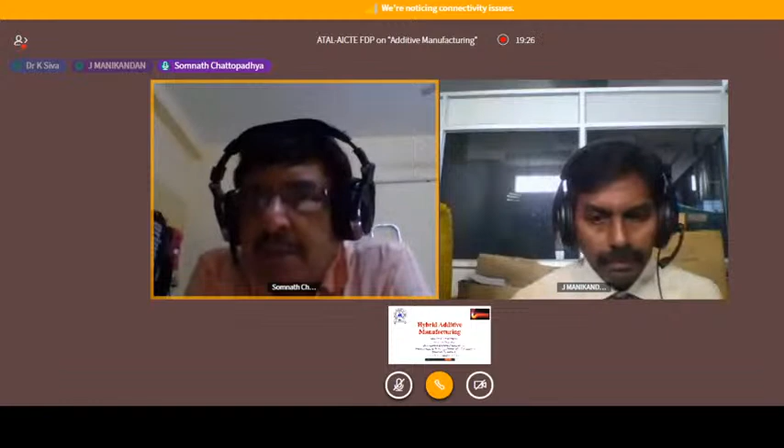So our topic today is hybrid additive manufacturing. Though this could be the last topic of additive manufacturing, I will start with some reverse engineering so people can get an idea about what is happening here and in different parts of the world related to manufacturing. Very interestingly, I'm grateful to Professor Karunakaran, who is singing the success songs of mechanical engineering, because everything has to be executed in deliverable form. And mechanical engineering means you can grasp the thing, so mechanical is associated with that.

Just to tell about the Latin word meaning of manufacturing, it comes from the word manus plus factus. Manus means by hand and factus means that which is produced. So manufacturing in the 15th century meant produced by hand. Today's manufacturing is anything but manus plus factus, that is, produced by hand. But still people stick to the old terminology, because before the industrial revolution, entirely the part is manus plus factus, produced by hand.

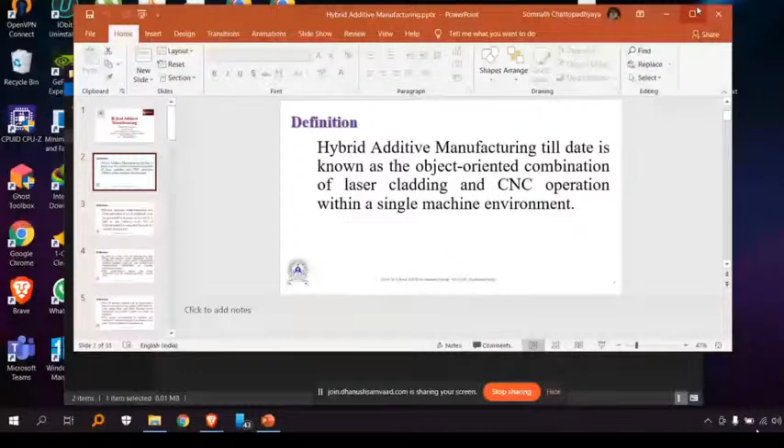Can I continue? Yes. So, I have told that object orientation is very important. So why laser? Laser is a champion strategy - just like a batsman can bat, laser can cut, laser can measure, laser can join, and do all sorts of things. And laser can perform very precise operations.

A little technical hassle is still there in laser because laser cannot generate huge amounts of power till today. So we are only limited to 20 kilowatt, 30 kilowatt, 40 kilowatt. So there is sometimes a limitation in terms of dealing with higher material deposition or higher material removal rate and the joining of thicker plates. So that is still a technical hassle, but otherwise laser can be used for everything.

It is just like a trump card in terms of joining as well as cutting, measuring and aligning, all sorts of things. Associated with the CNC operation in a single machine environment, we are looking for a universal machine which can join, deposit, cut, measure, inspect, and do all sorts of things in one single environment. With a few commands, we can change all those things.

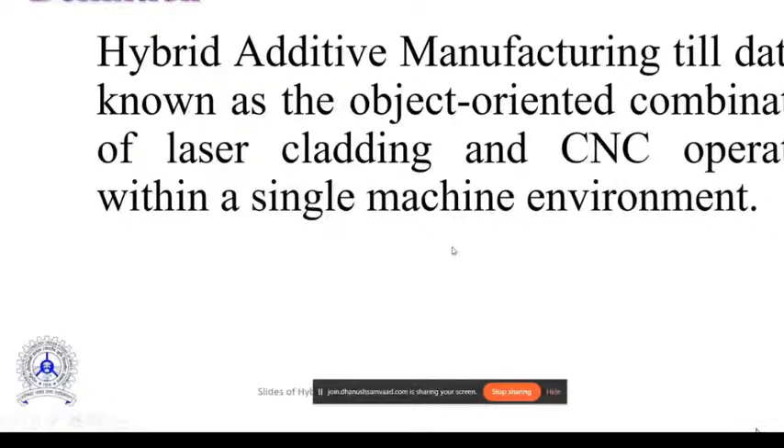So laser cladding, CNC operations and all those things are implemented in a single machine environment, and that can be a very good measure or strategy for hybrid additive manufacturing. This manufacturing has attracted a lot of attention over the past half decade, but it is still in its infancy with a lot of technological hiccups that have to be adroitly addressed, because there are uncertainties, and a road to success is always under construction. Hybrid additive manufacturing strategy is under construction because a lot of things have to be taken care of, many complex things have to be built into one machine tool so that everything can be done with different commands.

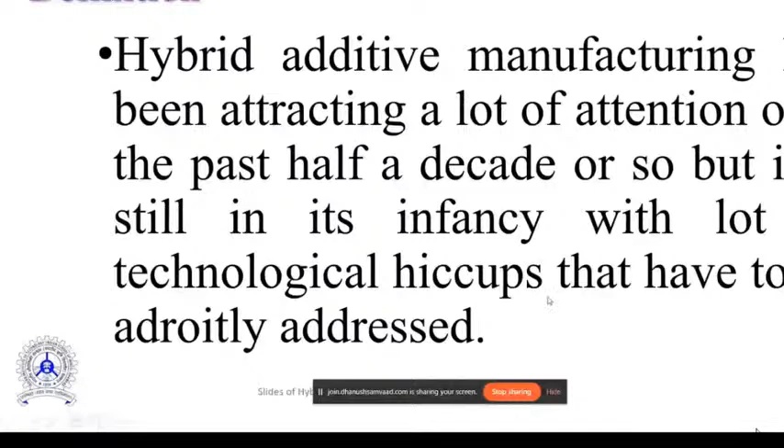So it refers to a new class of machine tool, not the ordinary one, that brings additive metal deposition. Rapid prototyping has been slowly and steadily transforming into rapid manufacturing. It is not only prototypes, even parts and components for very costly cars like Porsche and Mercedes-Benz are to be printed and immediately put forward. Even for space technology, where spare parts management is a very big issue. Very recently China has entered their space vehicle into the orbit of Mars, so this will become a very regular phenomenon.

Even if a bolt is in shortage, there is no other way to send it from the surface of the earth. So one has to print it out, and print it out for actual operation, not just as a prototyping one.

So deposition nozzle capability of the latest three-dimensional printing in the metallic environment, with axis control and metal cutting capabilities, because metal cutting is the intended removal of material. For finishing and high quality feature orientation, we still cannot substitute subtractive manufacturing. We still require some kind of machine tools which can take away material, so along with deposition we have to do some kind of post-processing in terms of material removal.

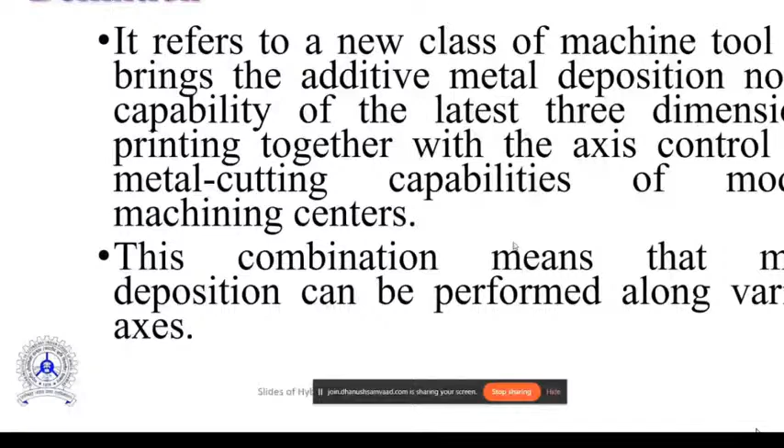So the 3D printed material can be machined to precise tolerances. Tolerances are becoming very narrow and the margin of error is low. So at any stage in the process, we can go back and forth between metal deposition and metal cutting as and when required. Sometimes we are positive, sometimes we are negative. Positive means we are depositing material, negative means we are removing material, and that has to be done in a single machine.

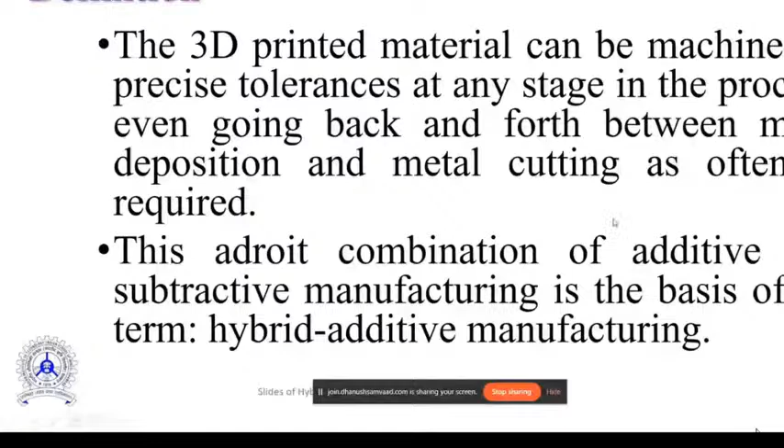This adroit combination of additive and subtractive manufacturing is the basis of the term hybrid additive manufacturing. So additive plus subtractive is combined. You can see these are the features we need for this kind of product. We will fundamentally change the perception of manufacturing components.

We have to make some kind of rope, just nanocarbon fibers. Nanocarbon fibers will lead to the manufacturing of material which has a strength to weight ratio 100 times that of known steel. And if we have this kind of nanofiber based composite material, then we can have a rope to outer space, so that instead of throwing satellites up by launch vehicles, it can climb like a spider along this rope.

So everybody, 7 billion citizens of the world, maybe in half a century or less, will have their own independent satellites. No monitoring and no problem with network related issues. Today we say humorously, it's not an official statement, BSNL means 'Bhai Saab nahi lagta' - but sometimes people say even Google se bhi nahi lagta. These kinds of network issues will be eliminated if everybody has their own satellite. That's only possible because satellite launching cost is very great. So if we can have this nanofiber composite material with a rope to the space station, our individual satellites will climb there - 7 billion satellites individually taking care of that.

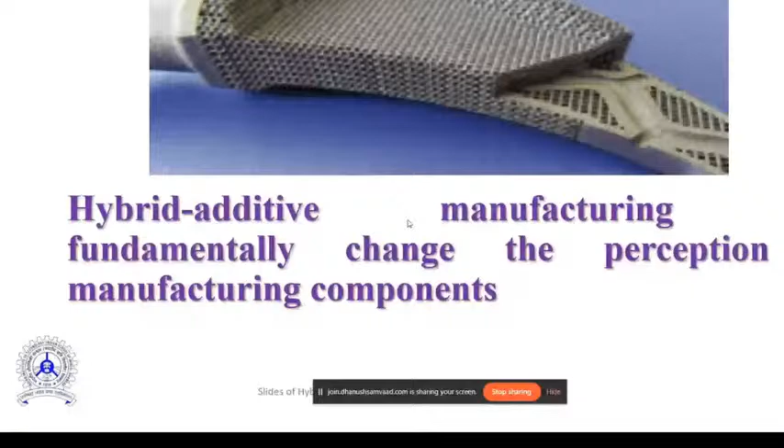I have to quote from the literature - literature people are very intelligent, they can see the world with a vision, and that is none other than Pablo Neruda. He said, give food to the people who are hungry and give hunger to the people who have food. That is the assignment problem in case of all these politicians - poverty and hunger are created by politics. So he said, give food to the people who are hungry and give hunger to the people who have food. And that is true for manufacturing.

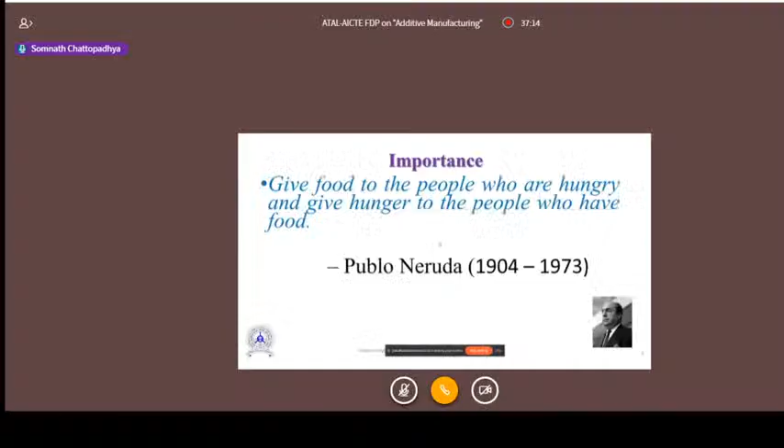This type of design I will consider as online design - it is not offline. We have online classes in COVID and other parts of it, but I always promote online design. Design should not come only as offline design, but nature believes in online design. I will give you some examples.

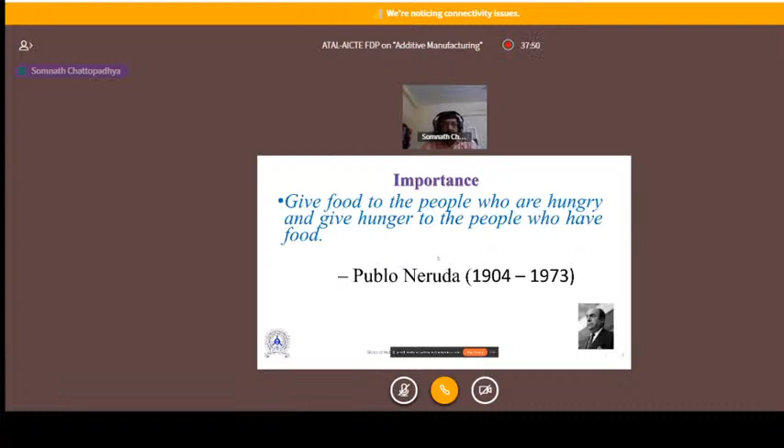Only hybrid additive manufacturing - these kinds of situations can enable us to go for these kinds of systems. So this powder deposition, the conventional additive manufacturing powder deposition process, allows placing material in the desired composition exactly where one wishes to have it. This is the Pablo Neruda rule: deposit the material when it is required, don't deposit it when it is not required. Powder deposition will enable us to do that. And one can manufacture things which are impossible to make the other way, including internal voids, webs, honeycombs, lattice.

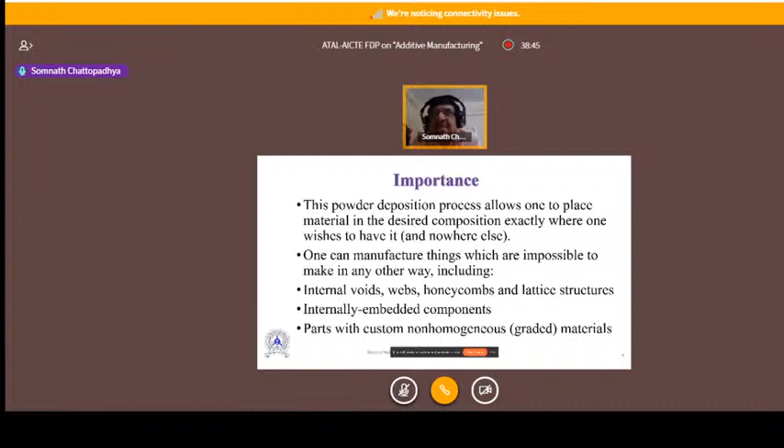Now, a lot of people - even my friend, a professor at University of Salerno, Italy - he is manufacturing artificial knees and limbs, mainly for hip replacement. He tells me that if hip replacement is implemented for all citizens, the average age of human life will be increased by 10 years more.

One decade increase is attributed to flush toilets - flushing toilets was first designed in civilization in the subcontinent. So those things are there, but the problem is that conventional titanium structures don't have appropriate voids. In our femur, tibia, fibula, and all sorts of pectoral girdle, there are a lot of porosities in the bone structures, and bone marrows are there. The bone marrows are the manufacturing place of red blood corpuscles. So these titanium replacements can give strength, but they cannot be the hybrid place, the generating place of bone marrow.

So we have to create appropriate voids in our artificial limb. That is why people are going for prosthetic generations, biogenerations, and stem cell approaches. The stem cell approach is much better than using other parts, because we can generate appropriate voids, webs, porosities, honeycombs, and lattice structures in this fashion.

Internally embedded components - we cannot have just one component. We have to think with sensors, whatever nature has done. Every cell is a sensor, every cell has some kind of sensor. There are billions and trillions of sensors, so even with just a prick we can understand the position and the irritation on the basis of the skin. So internally embedded components and sensors have to be there.

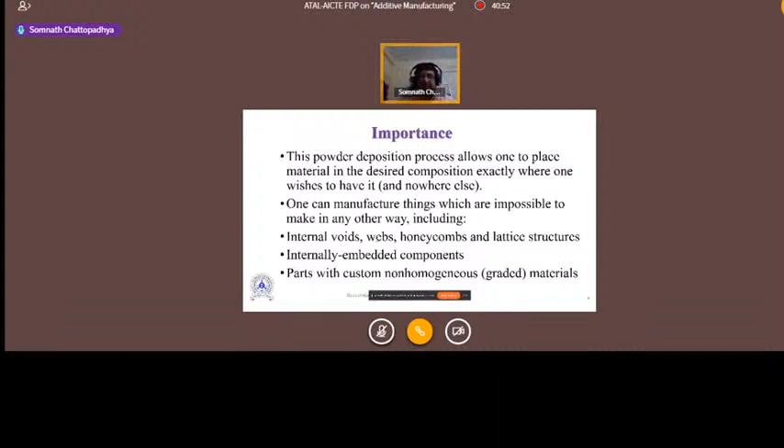I always take my students, my listeners, out of the closed chamber - that is from Tagore - take them outside from the classroom. In Santiniketan, classrooms are open. Unless you're open, your senses are not open. Unless you take our listeners to museums and other kinds of creations, we cannot make them sustainable learners.

Learning is just to inflict life into the fossils. So here, I always tell that everybody should go to Hyderabad to visit the Salarjung Museum, and you can see this human creation. We are far away from creating these kinds of features on a brittle material like rock.

If you are in the southern part, not far from Hyderabad, definitely visit the Veiled Rebecca of Salarjung Museum - a 167 centimeter statue, carved round and pedestal from a single block of marble without any joints. You see the sculpture, the capability of the Italian sculptor. I've seen a lot of sculptures in the Museo del Prado in Madrid, many marble sculptures there, and one piece is here - the Nizam spent a lot of money to get it.

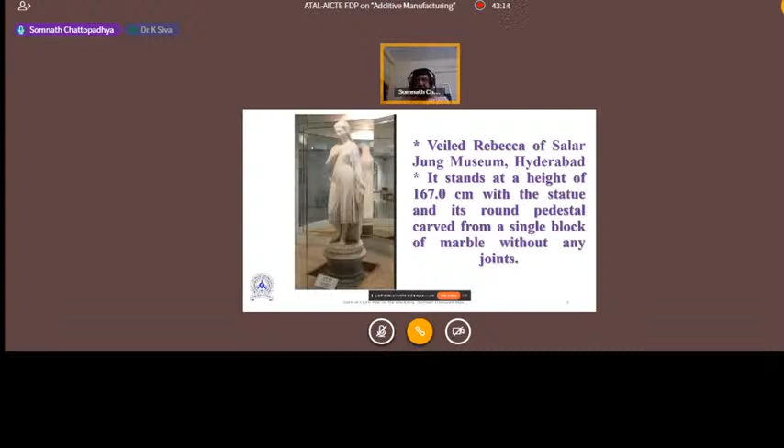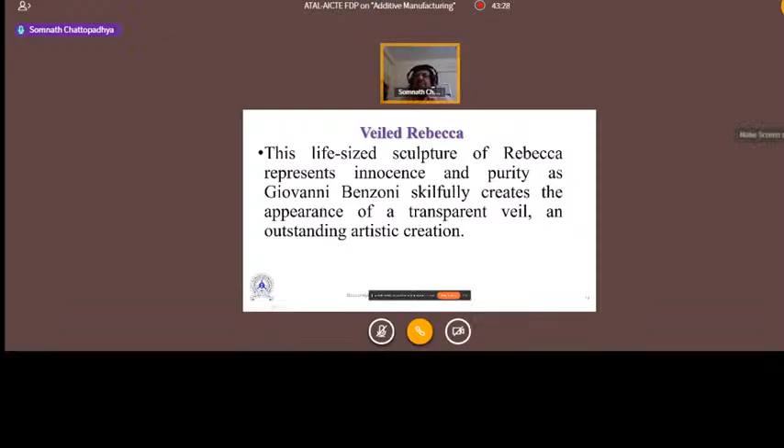So the life-size sculpture of Rebecca represents innocence and purity, made by Giovanni Benzoni - an Italian name, since Italian names end with vowels. You can understand it's an Italian name, and it creates the appearance of a transparent veil in rock. This is the ultimate level of human creation on solid rock, and today's manufacturing, creating all sorts of things and material liberation, may be a century or two behind that kind of work. So there lies the challenge of outstanding artistic creation.

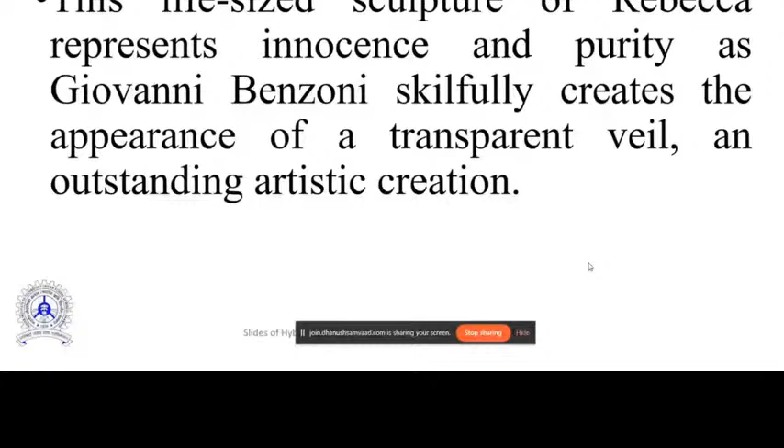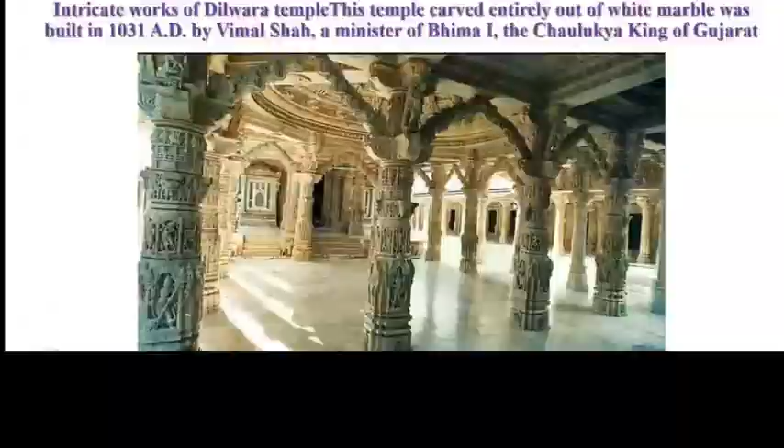You see another one - people visit Taj Mahal, but in order to teach material removal rate, material removal process, and machining, every student of manufacturing should visit this place - the intricate works of Dilwara Temple. This temple, carved entirely out of white marble, was built in 1031 AD by Vimal Shah, the minister of Bhima I. Can you imagine?

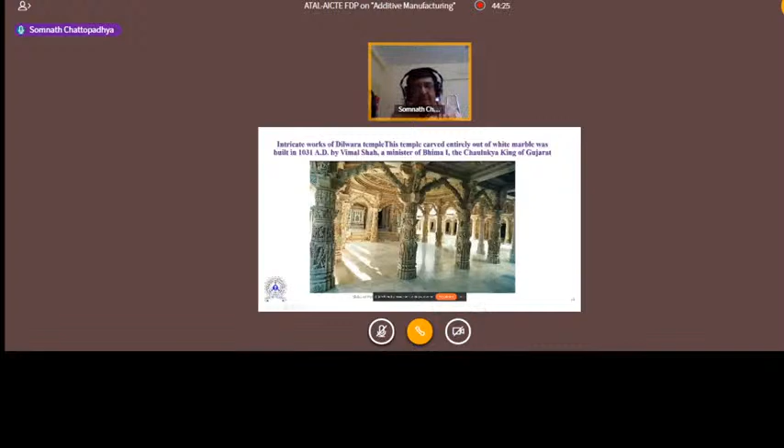What is the specialty? The curvatures and other details are better than the Taj Mahal in terms of artistry, because they removed material in a very tricky way. Whatever amount of material the workers could remove was valued in terms of powders of gold, and that is why you have these hanging structures - done in 1031 AD, the ultimate level of material removal from a very, very brittle material.

And that is done, what the Europeans cannot think. We have done Angkor Wat in Cambodia. We do things on marshland without European mortars and other architectural systems, and that's been standing in marshland for 500, 600 years. I definitely believe, I have total belief that we are better engineers than the Europeans.

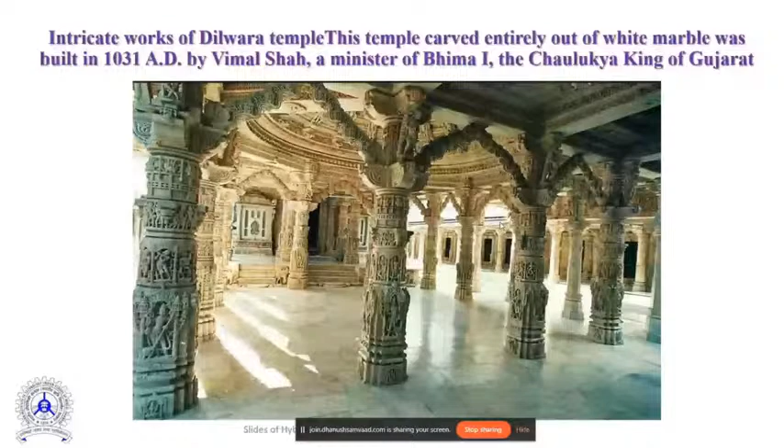Only steam engines and a few things put us behind, but we still have the technology of high quality material removal, maybe individually, and that has to be implemented in terms of mechanization and automation. So we have to see these structures and museums to understand what can be the ultimate challenges of material removal.

You see how nature is doing that - this is the claws. What is the advantage? You can deposit calcium and you can remove the material, so that anytime we need a tool, we do auto deposition or laser deposition, so that we don't have to change the tool by dismantling it, which takes a lot of time and causes wastage. So if the tool has to deposit some material and then remove material and make it sharp - that's what every animal is doing.

A tiger sharpens its claws after it gets bigger and bigger because of the auto calcium deposition in those places. And this is the motivation to bring these highly featured quality materials and tools into manufacturing.

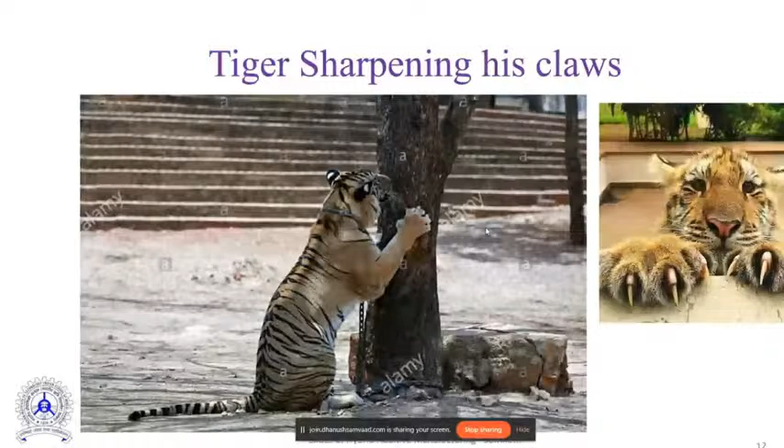You see another example - the tribal people of Northeast India, they are very clever. They make a bridge without any cost. They put banyan leaves and let them grow through, like moss and other things, to cover these places over maybe 10 years. And they can make a living bridge at Meghalaya.

So no structures and other kinds of things - let the banyan tree decide how it will grow, with consolidation by a lot of trees, and you just have to cut it out and shape it so the bridge is made. Living root bridges, no water, no bridge. People are thinking if we can bring these bridges without any supply chain hassles, then that can be done. And this is the chemonasty of plants.

How plants are doing it in a very clever way - they put all those things like tendons, and whenever there are stresses, they deposit more material, and according to that they take the curvature and the strength. This is the ultimate example of online design. I always tell people the best design is online design. If it is offline design, it's a dead design.

Whenever new conditions come, offline design cannot adapt. Take a bridge - if the load and other things change, you cannot change its shape. It is a dead design, an offline design. But every tree in nature - go outside and look beyond the windows - you will find the ultimate level of online design through chemonasty.

Trees deposit hormones wherever there is stress, and they grow accordingly, giving you infinite solutions to consolidate that part. So we have to go for hybrid additive manufacturing - maybe a gallant attempt, maybe a rudimentary attempt, maybe an infantile attempt - to replicate nature in all its forms.

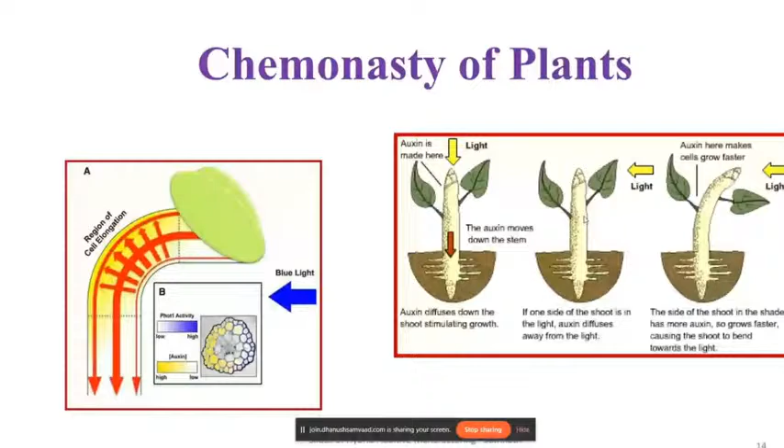As a result, material composition and placement become design variables, and engineering part performance can be dramatically improved. It can even be improved online if you can deposit and remove material within the component itself. And it might not be too ambitious to say that this technology will be an important catalyst for the next industrial revolution.

The next industrial revolution will happen in Asia, I'm very sure about it. Today's Asian economy is more than that of the rest of the world combined. At one time India was controlling more than 30% of the world economy before the British advent. At one time China was contributing 50% more than India, and China will make this happen - that revolution will take place definitely in China and in India, where we can have highly featured products comparable to the production of nature.

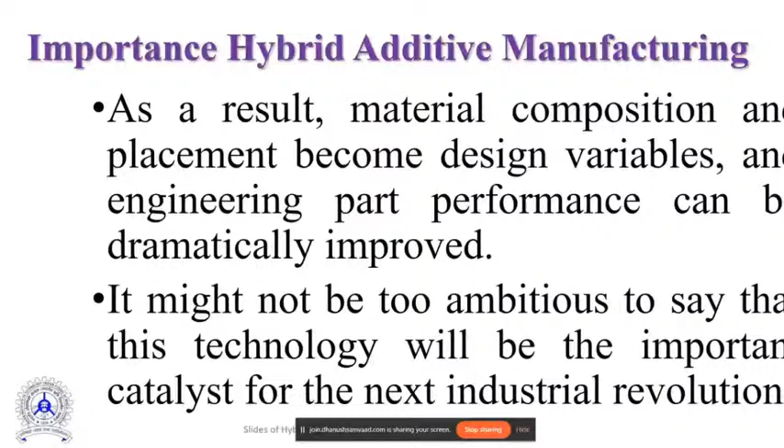So the relevant software provides support for new hybrid manufacturing technologies in which additive manufacturing - printing or metal deposition - is incorporated with subtractive cutting methods in a conventional machine-tool environment.

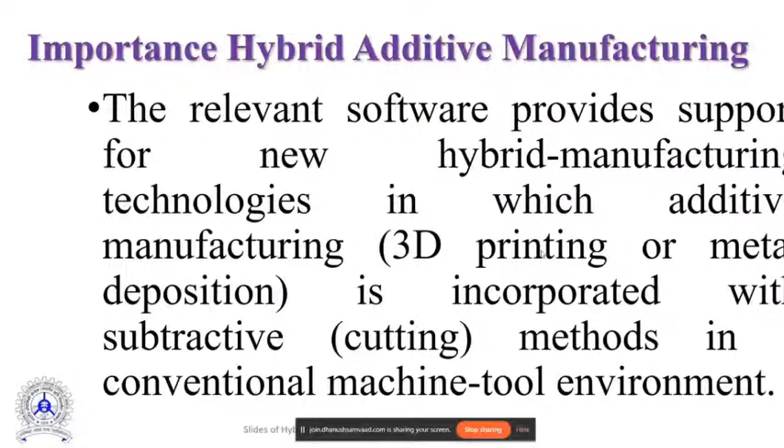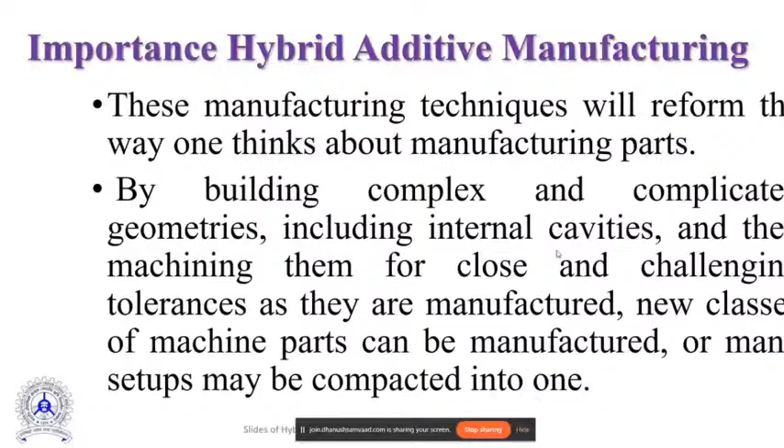Convention as well as the deposition has to be appropriately and judiciously managed to get those products. These manufacturing techniques will reform the way one thinks about manufacturing parts by building complex, complicated geometries, including internal cavities and voids, because female parts are always a challenge. We make male parts and tools and then produce the female parts and conjugate it in many kinds of non-traditional manufacturing processes.

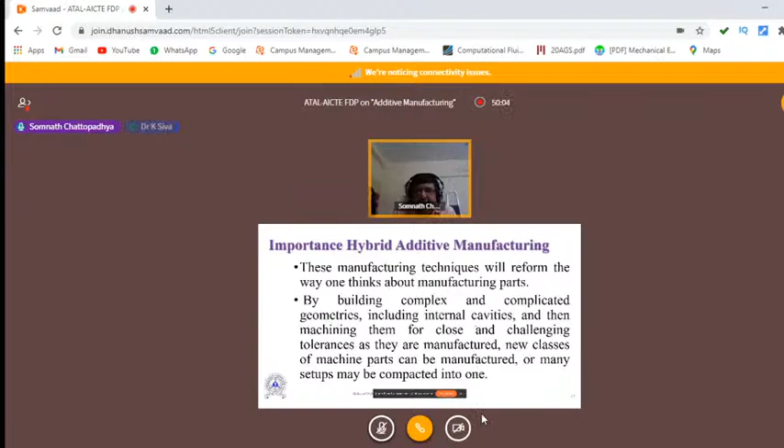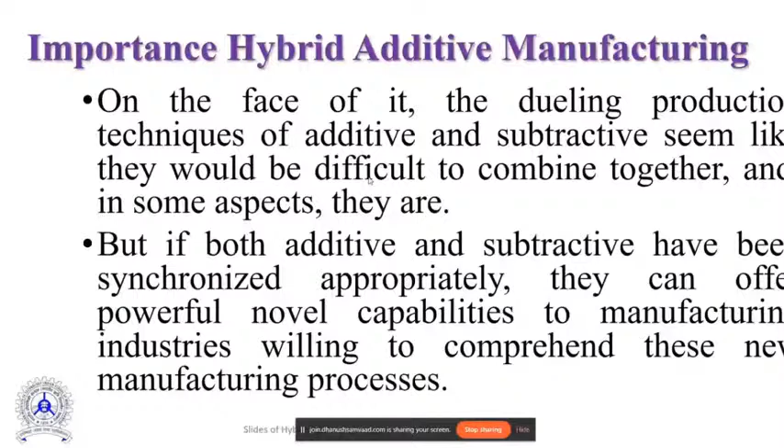So internal cavities, voids and other things are a bigger challenge than the machine parts. On the face of it, additive and subtractive production techniques would be difficult to combine together. This is the challenge, and if synchronized appropriately, they can offer powerful novel capabilities to manufacturing industries willing to comprehend these new manufacturing processes. This has the potential to enable new designs and machine internal areas during build.

We require self-lubricating bearings, self-lubricating shafts and all sorts of things with internal voids for retaining lubricant at the appropriate places so that it is not hungry for lubricant. We don't maintain huge supply chains in order to deposit lubricants at every stage. We tightly control tolerances during build and produce finished parts on one machine.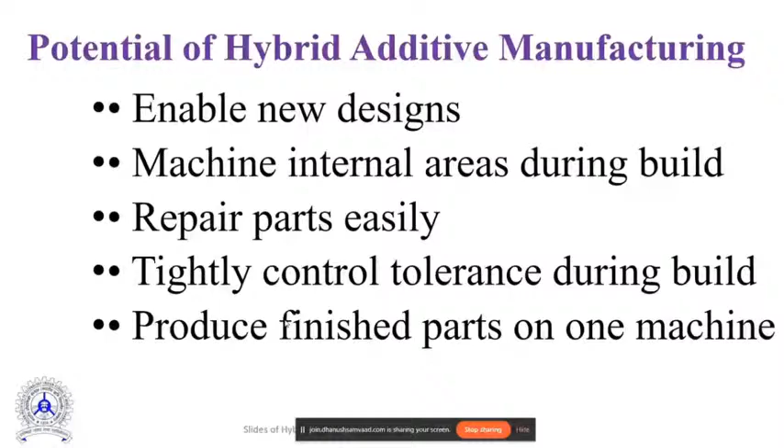One can appreciate the different kinds of things, decomposing parts into features for additive and subtractive. This is one kind of structure, where the nozzles are fitted in one machine. So this is the first part, then the second, third, additive, and here it is some kind of additive as well as joining, with maybe a little bit of machining.

According to that, in the same machining environment, these kind of highly featured components with software control in the same machine, we can come out with these kinds of parts. It is done in a single machine environment, while depositing, joining, and a little bit of machining, and we can come out with this part associated with it.

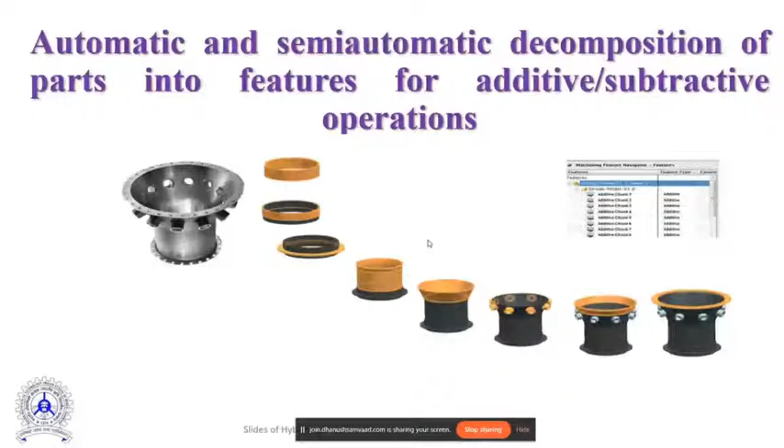Just like a team, we cannot have 11 batsmen or 11 bowlers. The combination is 5 bowlers, 5 batsmen, and 1 wicket keeper. So here maybe 50% effort for deposition, 50% for subtraction, or maybe 40 and 10% effort for joining. If you combine all sorts of features in one single machine tool, you can land up with these kinds of products at the end of the day.

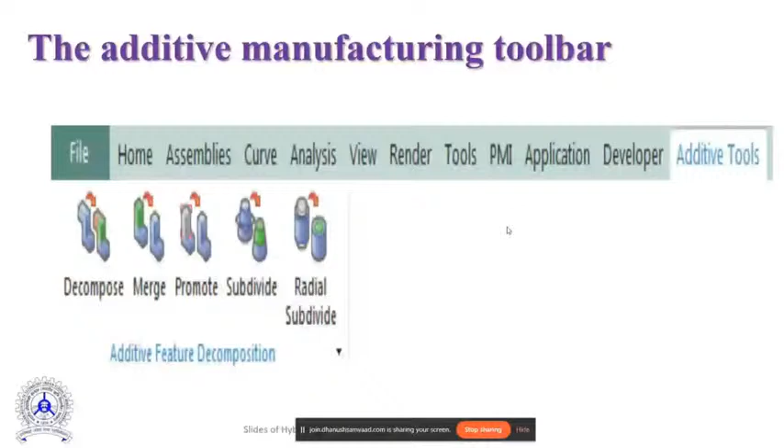There are different kinds of additives in the toolbars, where decompose, merge, promote, subdivide and all sorts of things are done in the CAD environment, and subsequently implemented in these manufacturing places in order to get these products. One can easily find it out in process workpiece verification works for both additive and subtractive.

This is an addition. Once addition is done, a little bit of deformation is required, which is sometimes better, and you can do some kind of machining also in order to have those features. You can ask whether every time you can deposit. Yes, but there are some issues - optimization time and other things will not be there, and there are some issues.

So accurately and skillfully, one has to combine, just like our team - we cannot have all bowlers or all batsmen. We have the combination as and when required. Subtraction and addition will be done, and according to that, you can come out with some better featured products.

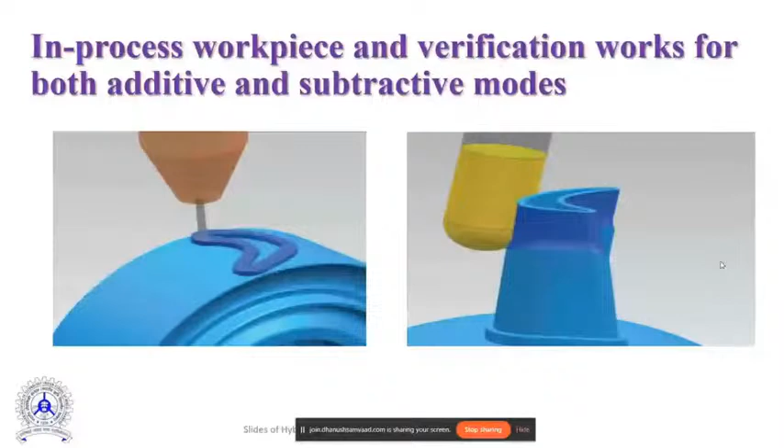Surface features can be additively applied to a part that is otherwise machined. So we reduce the efforts of machining, with addition and a little bit of other mechanical processes.

Like say, we are manufacturing the typical curvature of a turbine blade. The problem with the turbine blade is that it has to withstand high temperature and high stress. What should be the profile? It's a 3D profile, and where is the design available? In the dolphin wings, through reverse engineering.

Still people are really relying on CFD, telling us CFD can solve everything. The answer is not true. Still, how do the dolphins make this kind of jump, or a blue whale?

The weight of a blue whale is 200 to 250 tons, and half of that they can just jump out of the water, look around, and come back. Their fins and other things are flexible, and they can generate enormous force and lift from there itself. It is possible because of a very typical curvature, and that is a camber.

A flexible curvature - they can play with this camber, just like used to roll in terms of manufacturing papers. I have worked in paper machinery, and they use booster rolls in order to generate different kinds of thicknesses, so that the camber of the rolls can be changed, which cannot be changed in case of other kinds of rolling mills.

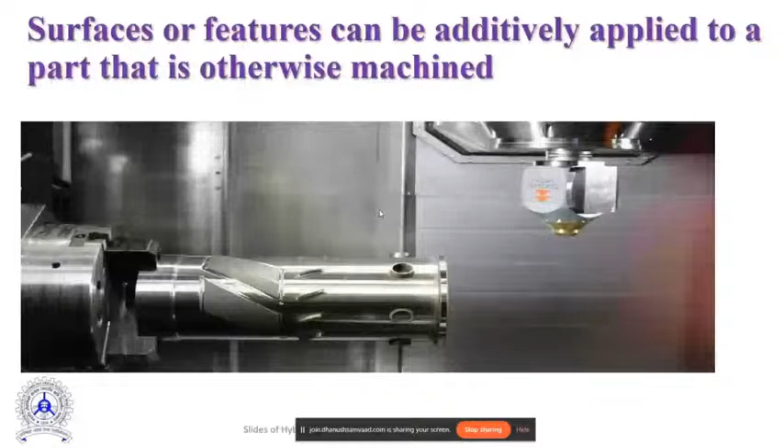You cannot have monolithic structures because this part and the cover part will be different materials - the structure, like tool coating, should be of tungsten carbide, and in between you have tool steel. The reason is that if everything is made of tungsten carbide, it will be very brittle. So hybridization is needed.

That is the flesh and other kind of muscle. So that kind of appropriate hybridization has to take place in order to do feature-based manufacturing processes in these environments.

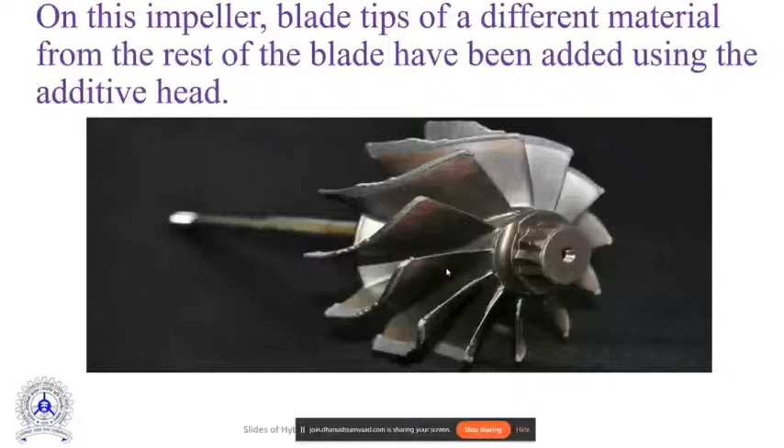So this is also one example. After the material has been added, the machine tool can swap in a milling cutter to machine those new tips flush with the rest of the blade, and that has to be done in a subtractive way after addition - that is the feature.

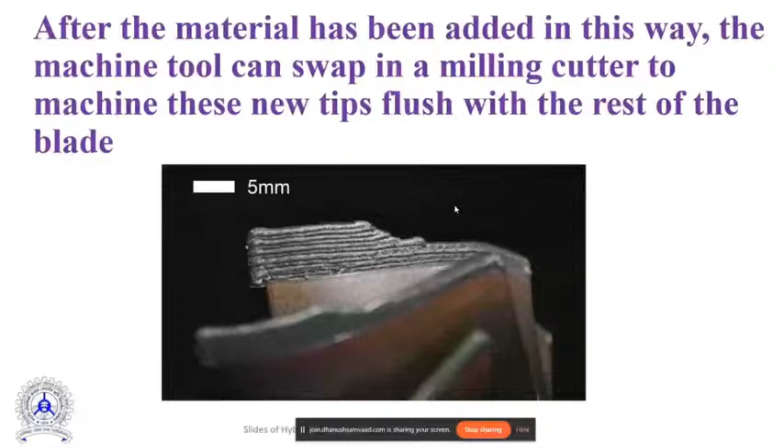Some machine tools actually use two hybrid heads, one for quickly growing material and one for rough cut and finish cut. Accordingly, that has to be strategized - which part is done with adaptive slicing.

Just like a vendor who is supplying ice cream to a party - if he finds the queue is big, he slices thinner; if the queue is small, he slices it bigger.

And the strategy of the person frying the puri is different. If the queue is long, he goes for bigger and thicker puris because that absorbs a lot of oil, so people cannot consume that much. So if the queue is bigger, the thickness of the puri will be bigger; if the queue is thinner, the thickness of the puri is thinner. So all those vendors at a dinner party are also strategizing those things, and that is known as adaptive slicing.

So this kind of adaptation has to be there - which part has to be done by which type of nozzle at what rate, so that the entire cycle time is acceptable and the quality is not compromised.

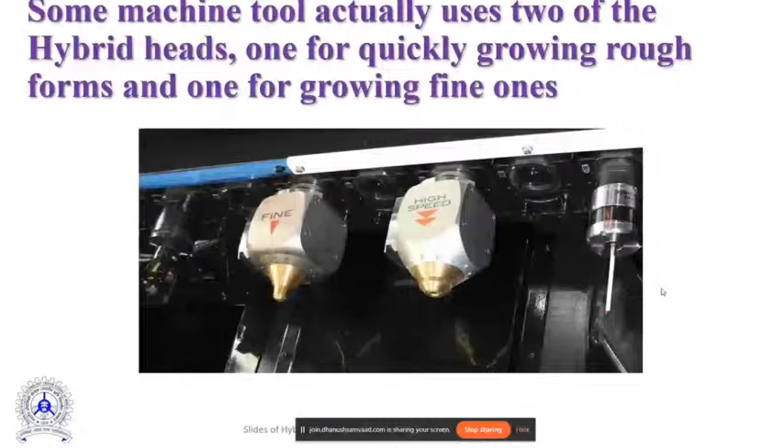You can see the hybrid additives. Additive subtractive machining centers additively creating a part with the features. So this is a deposition, and maybe a simple fabricated structure, and the entire nozzles and other things is a depositor. If you take from others it is sometimes a hassle. So the entire part including the nozzles goes for additive. These kinds of capabilities with lasers and other things people are thinking of.

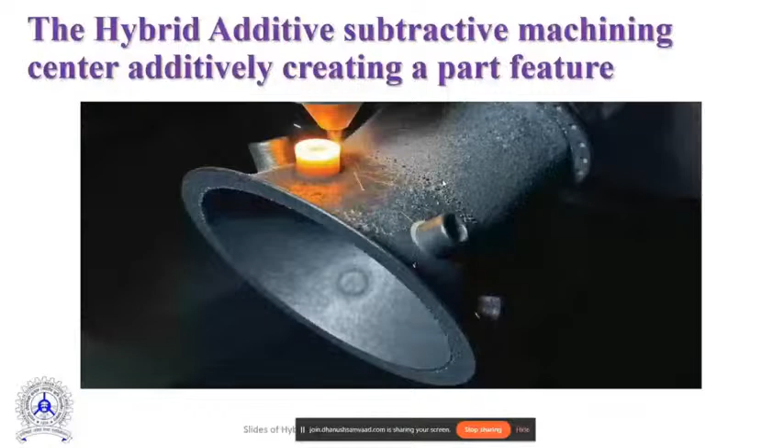Hybrid manufacturing also combines deep drawing and laser tool machine. The entire part is deep drawn and then additive is done on this part itself, maybe in the same machining environment. This is done by laser beam melting along with the deep drawing and the functional part. So people are doing all sorts of things in a clever way.

Now people are approaching monolithic manufacturing, so that handles and other things are not made of a different material. The same material, with some kind of notch and feature, will be the door of a modern day refrigerator, so that one doesn't have to assemble all sorts of things, and cycle time of assembly is reduced.

So this kind of hybridization has to be taken care of, because in many cases in our time, the metal cutting people are always at odds with the people of metal forming. Now they have to come closer together in order to do the manufacturing.

I have spent a lot of time in industry. I found that whenever a fault comes, the mechanical gang will visit first and say it's an electrical fault. The electrical gang will come and say it's a mechanical fault. Then when one shift of production is lost, the GM will intervene to determine what type of fault it is. I am not bothered about that distinction - the fault has to be addressed and we work hand in hand.

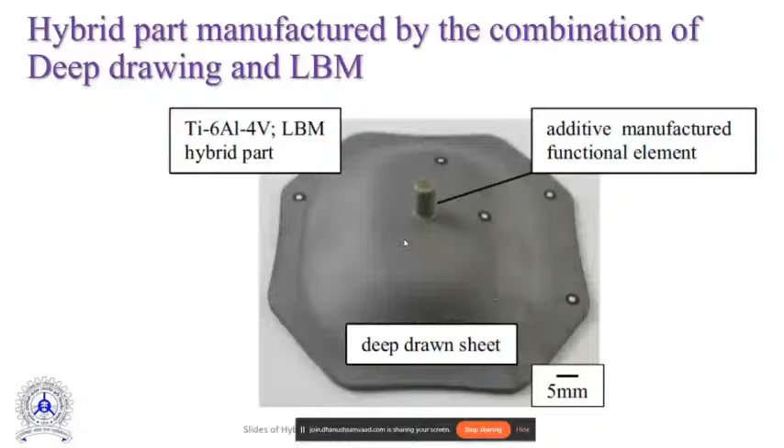So subtractive manufacturing and additive manufacturing have to work hand in hand. That way the additive head allows additive material to be used only where needed in the making cycle. Some kind of features instead of joining, because joining sometimes causes a lot of issues. If you can do all these things with lasers in a controlled fashion, the heat affected zone and thermomechanically affected zone will be very, very narrow.

And for the aerospace requirements, this deposition approach matters because for aerospace people, gravity is the biggest enemy. If 1 kg of weight is added to a space vehicle which is going to bring some kind of rock from the surface of the moon, that is equivalent to 1 kg of gold. So aerospace designers are ready to spend 1 kg of gold in order to reduce 1 kg of their aerospace vehicle's weight.

So this kind of judicious deposition manufacturing in the same machining environment has to be done, and that is required for aerospace. Aerospace is very relevant, because once China and India become very comfortable in aerospace manufacturing, which they are now approaching, then where will the white European dominance be? The future is Asia. Even the present is Asia.

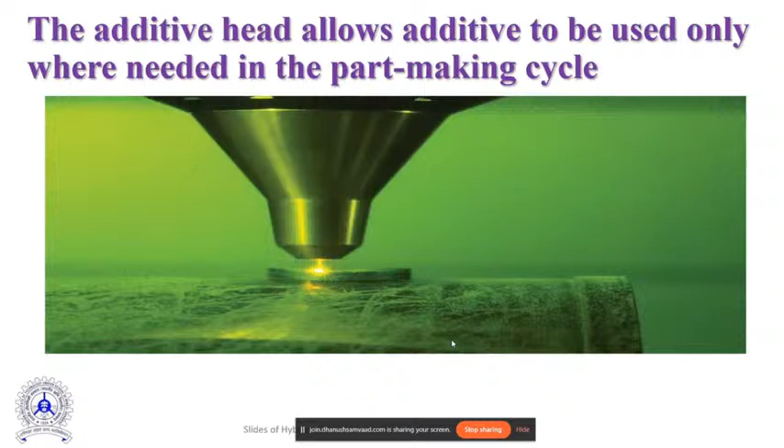So if we make all our inroads into aerospace, and dependency on the Western economy regarding aerospace is won over by India and China, then we will see only the Asian emergence - already Asia's economy is more than that of the rest of the world, and that lies in these kinds of strategic manufacturing processes for aerospace industries.

So 3D printing with a metal deposition nozzle where we can deposit all sorts of metals, and finally there's no need for supply chain management in terms of spare parts. Spare parts are printed, and that way we don't have to maintain large inventories.

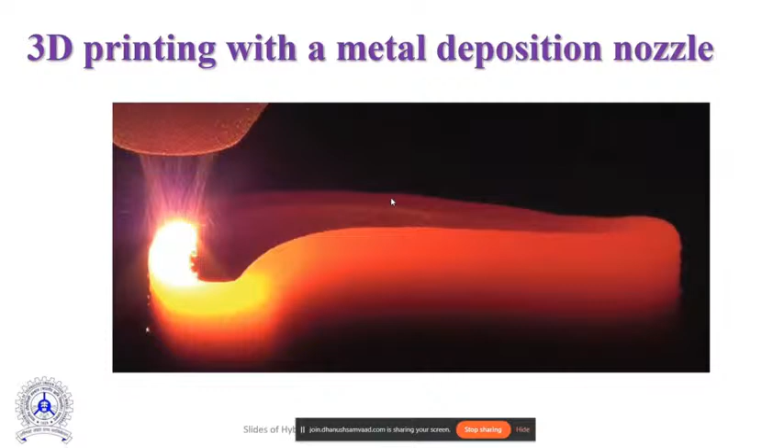Like in my country, in my first company where I was in 1994, I found 1 crore rupees worth of spare parts. That 1 crore by today's value would be maybe 100 crore, or 40 or 50 crore of unnecessary spare parts. You can print it out instead, so you can run on just-in-time or zero inventory type of situations. So there are different categorizations.

I have shared the text material with all the listeners and organizers. So laser beam melting - what can be the characteristic complex part, limited - and the process combination, integration, process chain: laser metal deposition, and then we can do some integration with the CNC machine, metal powder application, gas metal arc welding, and other things also with CNC milling in one platform. That is the categorization of the additive manufacturing strategy combined with conventional methods.

It depends on the requirement - how we can marry additive manufacturing with subtractive manufacturing depending on what is needed.

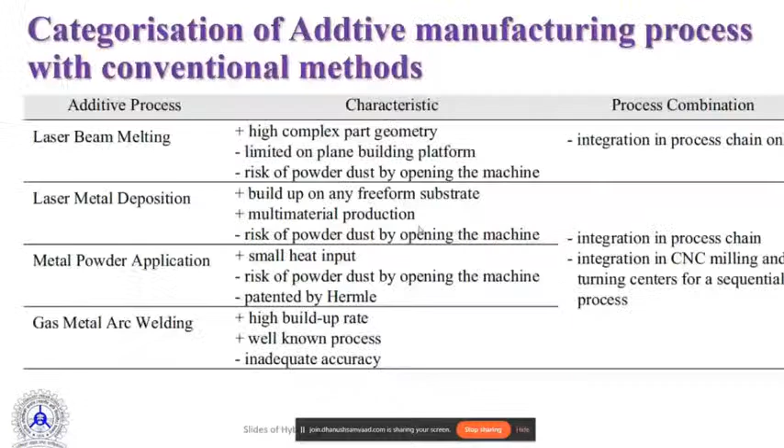Summary: science-enabled technology development for 5-axis hybrid additive machining center. The European Union does not sell 5-axis machining technology to India, because they fear India will copy it and use it for defense and missiles. So India has to build it out. A professor from IIT Delhi, Professor Sunil Jha, is working on this, making and selling such systems to DRDO and IIT Delhi, along with the IIT Delhi lab, since 5-axis systems otherwise rely on European technology. So you have to build it yourself.

Atmanirbhar Bharat is essential. If we claim self-reliance but still purchase arms from Western economies, that is not a clear position - in case of war, the Western economy would have the advantage. If we purchase arms from China, how can we fight against those same arms, since they know them better, having manufactured them? So Atmanirbhar Bharat is not optional - it is indispensable. Unless we make our own arms and ammunition domestically, we cannot achieve military supremacy. That is the end of the day.

So the highest investment is required in R&D technology. Robotic free-form deposition systems require control over degrees of freedom so the robot can reach any point and deposit material as required, along with commercialization of these technologies in existing industrial areas.

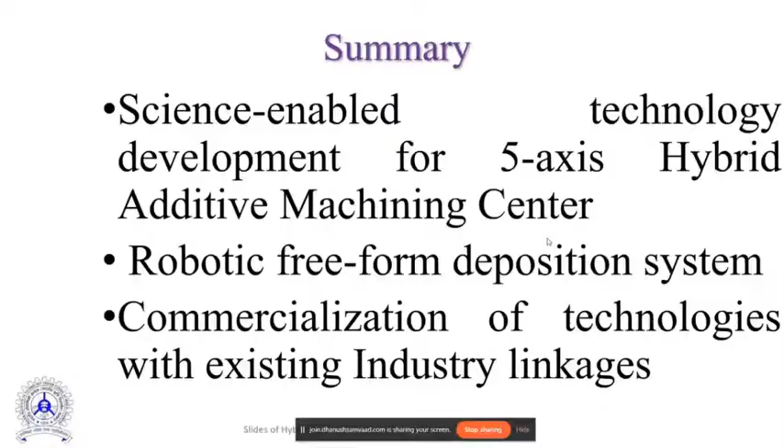I've taken these references, and next I will show some important slides from a professor in Finland, Professor Pedro Vilaça, to excite my listeners about friction stir welding and friction stir processing and their future applications. Professor Vilaça is a well-known professor in this field, and was even on the jury judging a PhD at a very old age. He worked alongside Wayne Thomas, the inventor of friction stir welding, at the welding institute in the UK. I was fortunate to spend 5 weeks in Finland with students at Aalto University, and he was kind enough to share some of his slides with me.

One can see this is additive manufacturing by welding - let me go to the big screen. This is from Professor Pedro Vilaça; I was able to establish contact with him. I was interested in bringing him to this webinar but he's a very busy person. I did bring Professor Feroz Alam, but was unable to bring Professor Vilaça this time - but next time, yes.

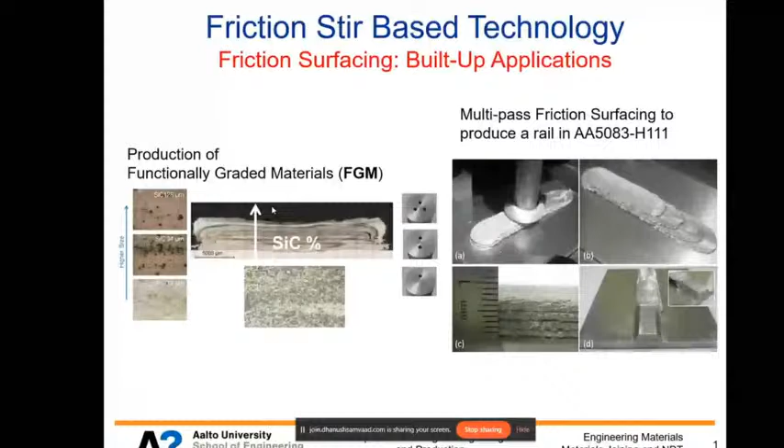So, friction stir-based technology and surfacing. We have done a few experiments on friction stir surfacing - we can surface various materials, implementing different characteristic features on surfaces, and based on that we can create functionally graded materials, achieving these features even with very hard materials.

The advantage of friction stir welding is that you can join surfaces that are typically not weldable or compatible materials. The difference between traditional welding and friction stir welding: in traditional welding we have a spark and then the bond remains forever, but the weld point material is not similar, making it more like a 'divorce' than a 'marriage' of materials. But with friction stir welding, all these materials can bond properly without going into the melting point.

And you see, this is the thing I want to show to all my listeners.